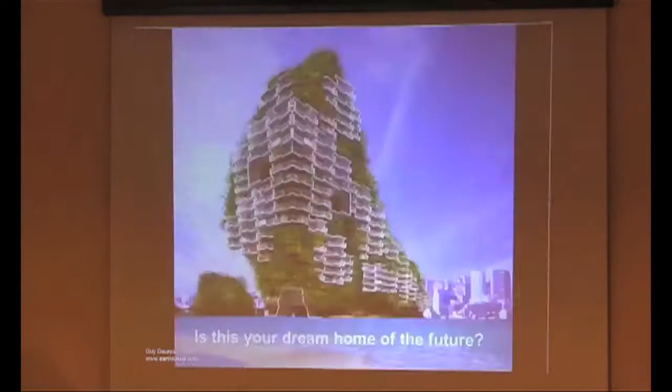So now for just some playful stuff, how would you like to live? I'll give you a choice of some buildings. Do you fancy living in a setup like this? Or that? What's your preference? Hands up who'd like to live in this one? 1, 2, 3, 4, 5, versus this one, the rest of you. Okay, next choice.

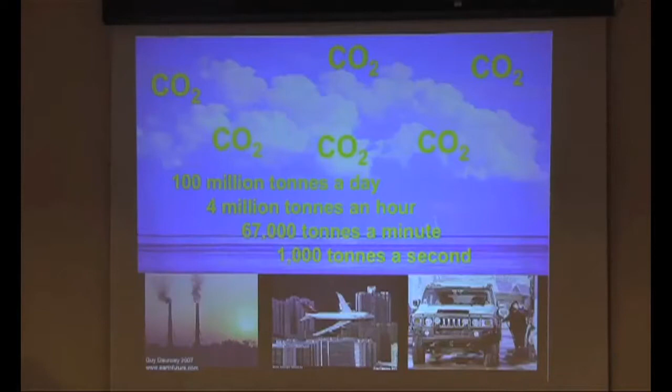And if everyone lived like we do, we'd need 2 more planets to sustain the constant flow of resources we're pulling out of the ground, the energy we're pulling out to make life happen. We're putting 1,000 tons of carbon dioxide into the atmosphere every second from our activities, 24 hours a day around the world, and the atmosphere's temperature is accumulating. So if you had a friend whose temperature looked like that, you'd go like, oh my God, Daddy, you're going to die.

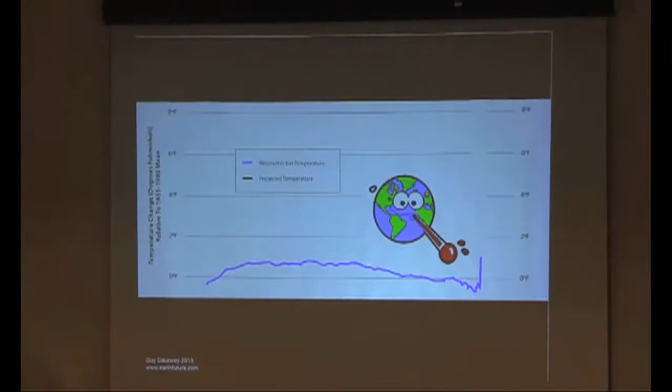Our planet is looking like that and heading for that. We need the same kind of gut reaction, because carbon pollution is going to end the entire era of stable climate over the last 10,000 years. That's where we're heading already. We're on the upward curve, and we have an emergency we're facing. There is no way on the present path we're going to be able to stop below 2 degrees Celsius increase. We're heading for 4 degrees Celsius increase, and 4 degrees paradoxically collapses the global economy. So the reasons we're trying to say we can't do anything about climate change because it might harm the economy will actually kill the economy, because we can't survive 4 degrees Celsius.

With coastal cities facing $1 trillion in flood damage by 2050, just for repairs. And then just last week we saw one of the most powerful, if not the most powerful storm ever to hit land on the planet, in the Philippines. Massive, 2 million people I think it was, out of homes, displaced.

So the last time the temperature was 3 degrees warmer, the sea level was 25 meters higher, which is like more than an 8-story building. So how do we respond to sea level rise?

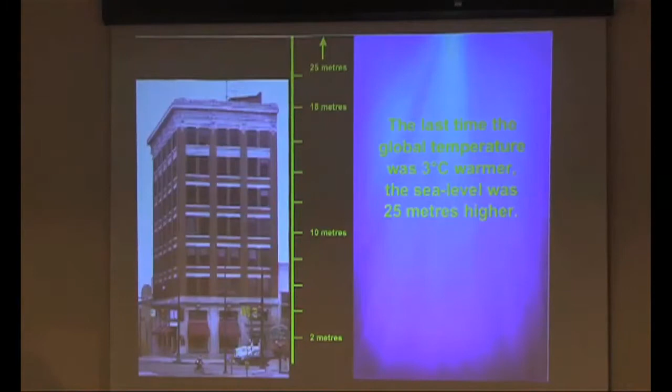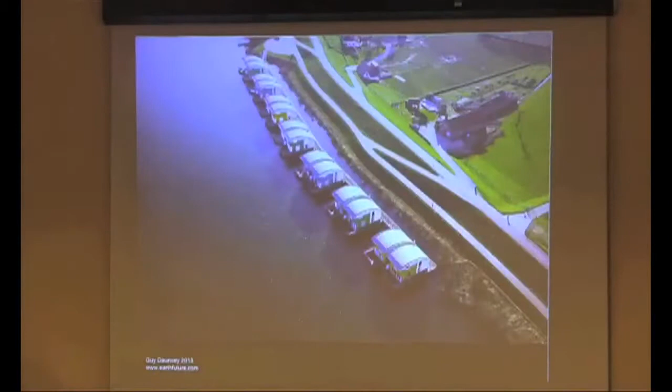Do we go the Dutch way? Does everyone get to live in a house like that, one that goes up and down with the tides on posts? Or the same buildings from the front with the posts. There we are from above. Another version of floating houses. Another version in Louisiana, where you just put it on styrofoam, but the same posts, it floats up with the tide. And a simpler version.

But in reality, okay, of course these are the ones - if you've got a tax haven, you can afford this, right? If you haven't got a tax haven, or even if you've got a big tax haven, you live in that. Or if you've got no tax haven, you do that.

But in reality, we're talking about cities. And all these people - you know, a lot of Vancouver is at sea level - needing to live somewhere. So it ain't gonna work, living in little floating bunkhouses like that. There's New York, also at sea level. We've got a major challenge here.

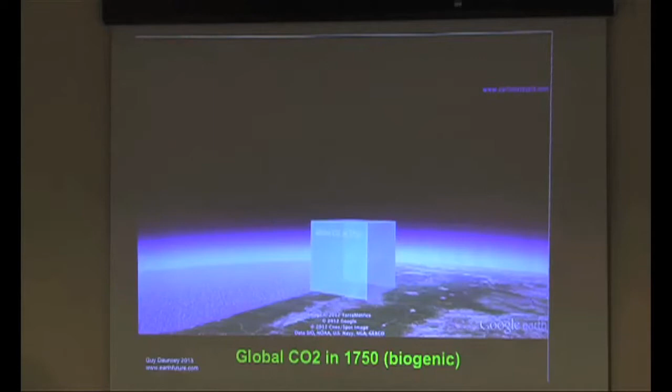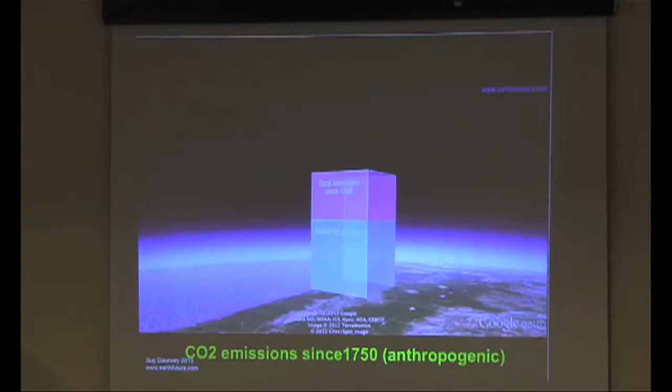So when we look at carbon dioxide: in 1750, before the industrial age, that's how much natural CO2 is in the atmosphere as part of the natural biogenic cycle of trees breathing in and breathing out. We've added that much from burning fossil fuels since 1750, mostly burning fossil fuels, also tearing down rainforests. That's how much more we can afford to burn in order to stay below 2 degrees. And that's how much the fossil fuel companies have got listed on their reserves, on which their stock values are placed, which they're planning to burn. So it doesn't work - we have to leave 80% of those fossil fuels in the ground.

So basically, on business as usual, we're heading for the cliff. We're the great buffalo jump of the world. And we're looking at collapse.

But if we turn left, there's a whole other future. We just take our gaze away from business as usual and look over there - there's a completely different world waiting for us to see. So what is our vision of that future? Because if that future becomes so attractive, we're all going to want to turn there, and no one's going to want to carry on towards the cliff.

If there's no vision to look for, habit kicks in and no one knows what to do. So we've got to have a vision that is more powerful than the fear. That's the piece that's been missing in the entire climate debate for the last 25 years. So what is our vision of the future?

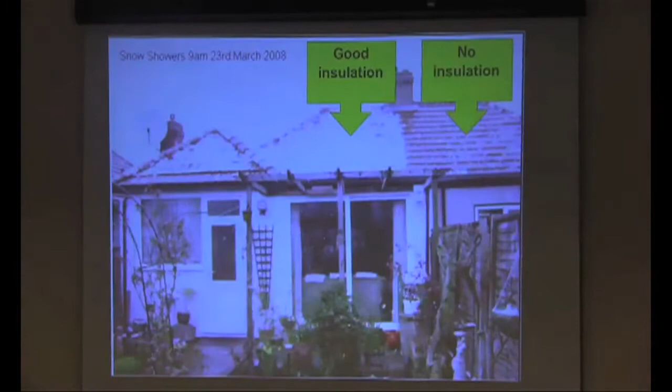The first is energy efficiency. You can go out on a snowy day and see buildings erected within the last 15 years that are losing snow because they just don't have decent insulation. You can do infrared photography and find out what's going on, even on a whole street level. This is happening in London - you can see a whole block of streets where they're losing energy, and a school that's obviously not.

Most of the 2032 building stock will be today's buildings, so we've got to retrofit the lot: the building envelope, changing heat to heat pumps, changing power to solar PV, and using the finance to do it.

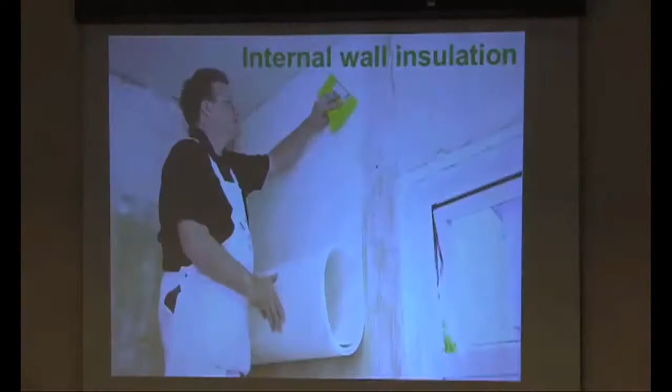So it's everything from the red blower door to find out where the leaks are in your home, to extra insulation. Internal wall insulation is now going ahead in Britain - it's on the inside of your rooms. External wall insulation is happening in Britain too, to actually add an extra layer outside the house. If you haven't got a cavity wall, a lot of Britain's houses don't, so you add an external wall like this.

And that's a close-up in detail of what the external wall looks like, with foam insulation in the middle.

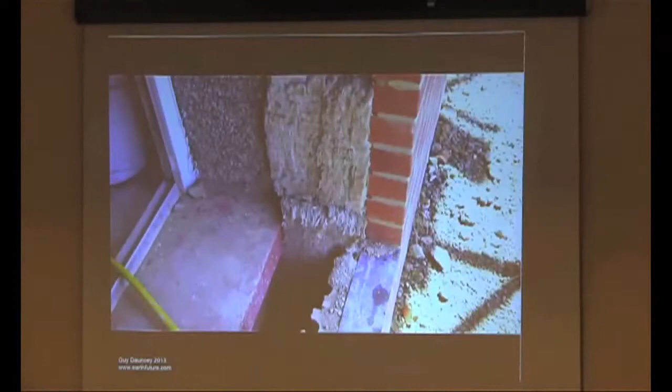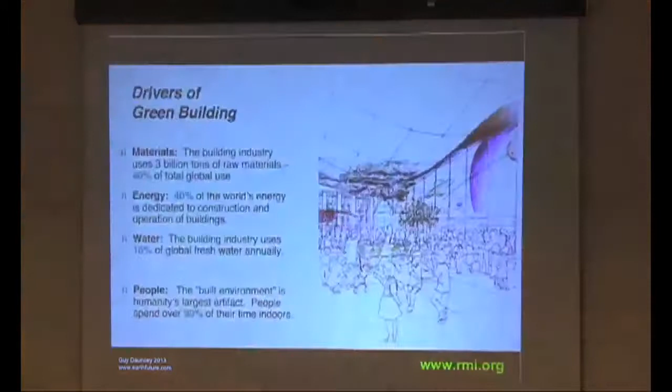The organisation Architecture 2030 has really gotten a good handle on commercial buildings, with a vision of getting them down to zero, being totally carbon neutral by 2030. What's driving it is the impact of materials, energy, water, and human use of them all. So basically, the current US building stock is what it is.

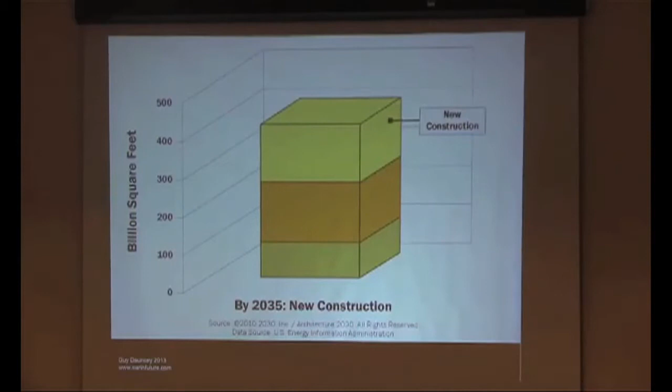A certain amount will be demolished by 2035, a whole lot will be renovated, and there'll be new construction on top of that. So the goal is to get fossil fuel use right down to zero and carbon neutralize what's left, substituting with efficiency and renewable energy.

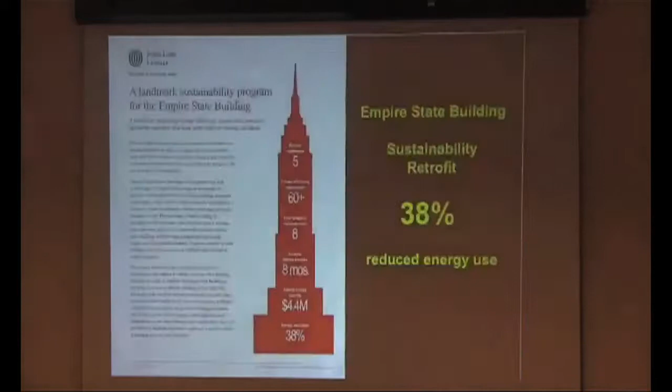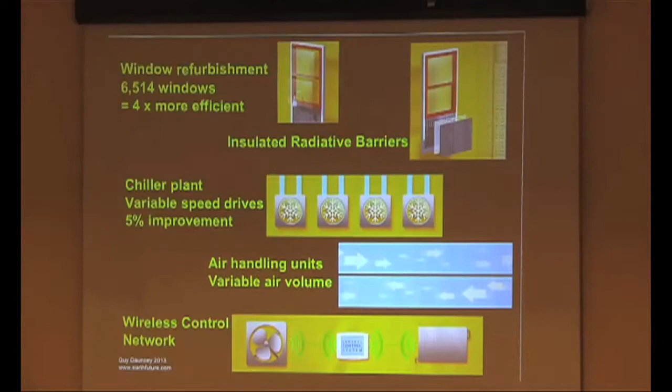To take an example, the Empire State Building in partnership with Rocky Mountain Institute got a 38% energy use reduction just by, I think, 8 basic measures: window refurbishments, insulated radiative barriers, changing the chiller plant speeds, adding air handling units, wireless control networks, changing plugs and lighting, adding daylighting, and doing tenant energy management.

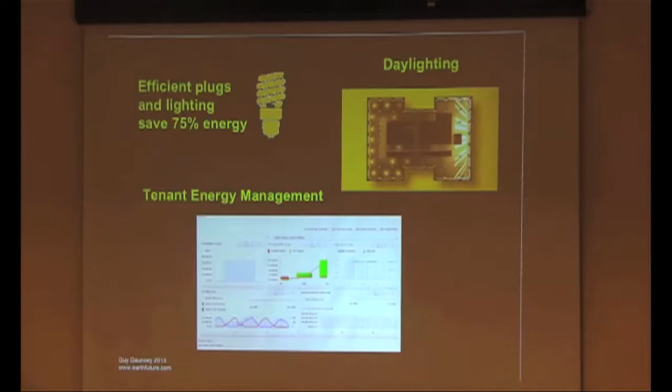So they've really maxed out what you can get for existing buildings. That's pretty good - 38% is about as high as you can get, and that's all done cost effectively with payback.

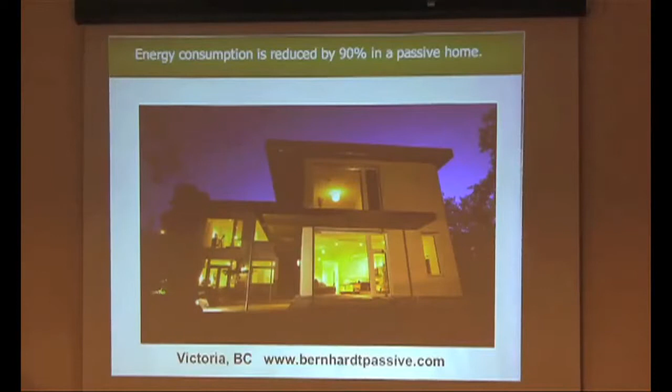For new homes, we can achieve a 90% heat energy reduction. Right here in Victoria, the passive house built by the Bernhardt father and son has shown that they can do that for effectively the same cost as a regular new building.

That's what it looks like - up in Saanich, looks like any regular building. What are they doing here? They've got 16-inch foam insulation under the slab and outside the foundation walls, 8-inch studs, special triple glazed windows, a second interior wall for the servicing, air tightness, blown cellulose insulation, heat recovery ventilation, and natural gas for hot water and space heating with a little on-demand heater - minimal stuff.

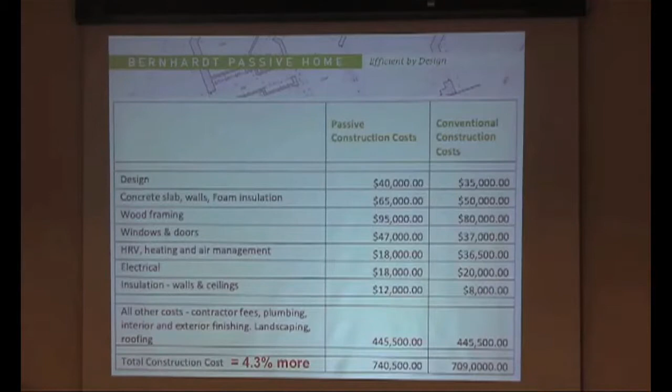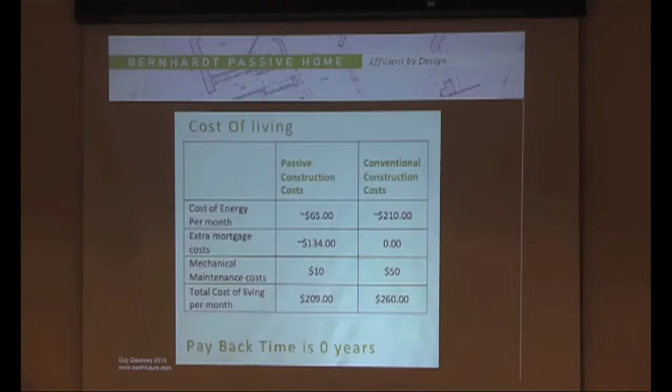The mathematics shows the total construction cost was only 4.3% more than if it had been a regular house. This is a duplex, by the way - 2 homes in one, hence the building cost of $740,000. But the payback time is 0 years because the savings on energy are greater than the extra mortgage cost for the 4.3% increase. They said this is the first time they built a house like this, so next time round, and they're working on a new project right now, they want to get the price down so it's even equal. That's the triple glazed window insulation they're bringing in to make these things happen.

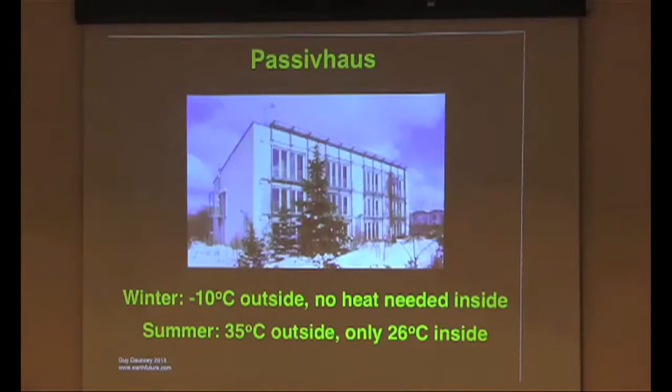These are other passive houses throughout Europe. In a passive house, you don't need any heat until it's -10 outside, and you don't need any air conditioning until it's +35 outside, because the insulation, air tightness, and air exchange look after all that. There's 25,000 of these houses built in Europe, 10 times more efficient. These are all examples of passive houses, so architectural style can be all sorts of things.

Using 90% less energy. When you add solar to the top, they become zero net energy. All possible, all doable. Then we look at other building materials that get efficiency.

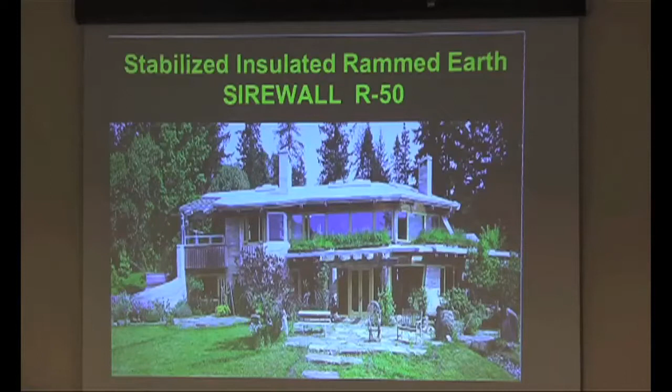So stabilized insulated rammed earth with the company on Salt Spring is getting R50 in the walls, which is on par with the passive house. It's 13 times thicker than the same thickness, it's getting 13 times more efficiency than a regular concrete wall, and 5 times more than a regular rammed earth wall.

There's straw bale construction, which can give you lots of beauty, there's cob construction, and there's an Earthship in the Highlands, and then the numbers look like this. A tent is R1, for contrast.

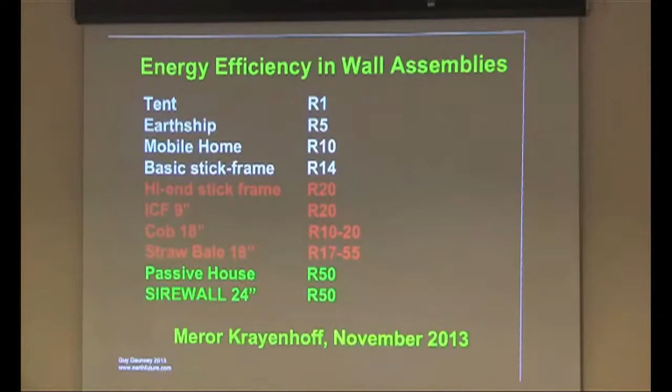High-end stick frame is R20, cob is up to R20, straw bale up to R55, passive house R50, a SIREWALL R50. So you can get that incredible efficiency there.

When we come to zero net housing, the law now in California is that every new home must be zero net energy and emit no carbon and give power back to the grid starting in 2020. And in Britain, every new home must be zero carbon starting in 3 years' time.

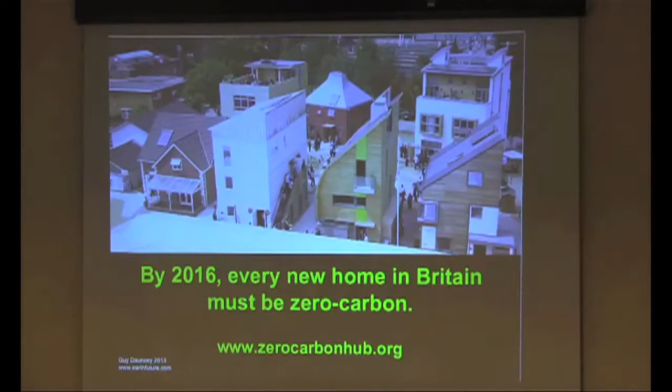So they just made it the law for the whole country, and the whole building industry knows that. We could have done this in British Columbia back in 2007, when we brought in our climate action legislation. But whenever you bring it up, the BC Home Builders Association basically doesn't want to know. They've got reasons, and we've got reasons.

So then we look at the actual heating for buildings that aren't passive house and need some kind of heat. If we look at the family of renewable energy heat pumps, there's a whole lot of stuff coming in on this. So a basic air source heat pump is actually a solar heat pump.

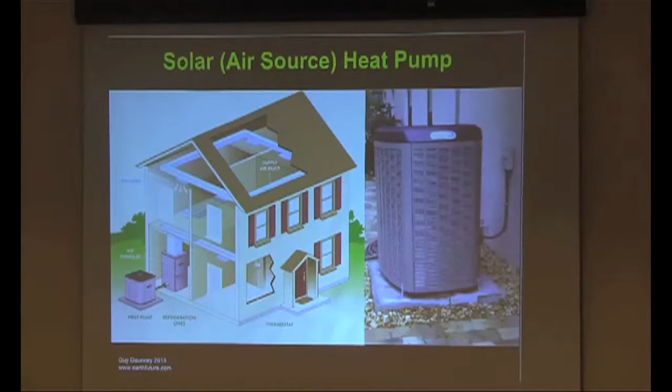But all of the air that's put through a heat exchanger in an air source heat pump is heated by the sun. It's a solar heat pump, guys. And if the market called it a solar heat pump, we'd get a lot more uptake to use them. There are lots of these things all over Victoria already heating their homes from the heat of the sun. And in our coastal climate, when it's not -20, it's just fine for your needs.

There's a ductless mini split solar heat pump just for one room, if you've got no duct system in your house. So you can substitute for baseboard heaters if you want to.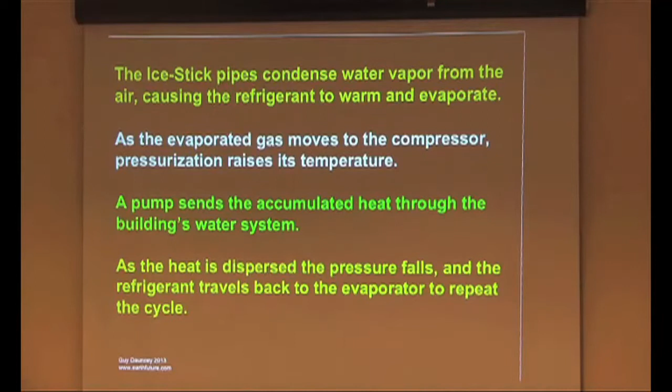Basically, this is taking solar air moisture, or air moisture heated by the sun. So the pipes condense water vapor from the air, causing the refrigerant to warm and evaporate. As the evaporated gas moves to the compressor, it raises its temperature. The pump sends the accumulated heat to the building's water system, and as the heat is dispersed, the pressure falls and the refrigerant goes back.

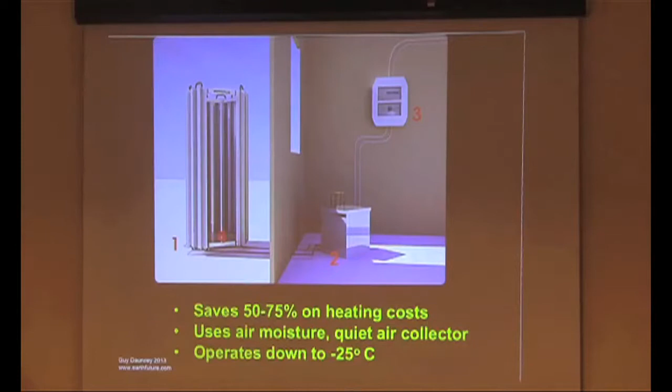Show what's possible, right? Ground source heat pump—there's a long debate, is ground source heat solar heat or geothermal heat or a bit of both? It depends how deep you go, basically. If you're drilling down deep, it's definitely geothermal. If it's surface, it's probably solar.

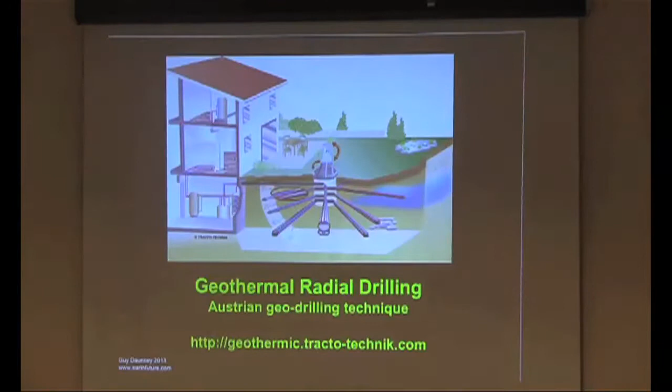But this is doable throughout the prairies. Normally, you dig a trench like that and you lay your coils through the trench. In Europe, they're doing radial drilling. So one little hole in the garden, and they can put in the drilling like that, and the whole garden stays in place.

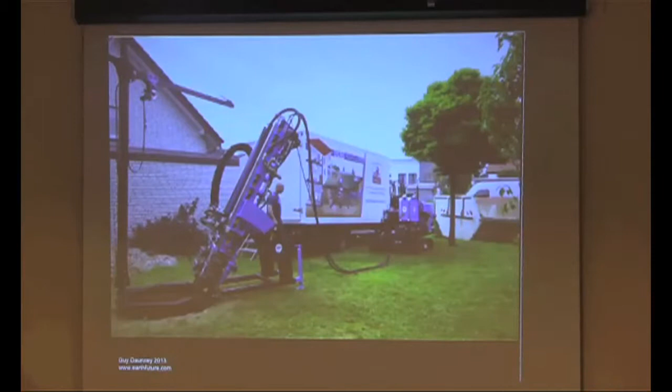No one needs to dig up the roses. They retrofit through the pipes the heat pump exchange units, and in one day, with 24-hour operation, they got a ground source heat pump installation installed, as opposed to the kind of upheaval we're used to over here, when you've got to dig up the whole yard for this sort of thing over and over. So obviously that's going to be cheaper done that way.

Water source heat: the college in Mill Bay, Brentwood College, the arts centre there, is heated by water from the Saanich Inlet. To you and me it is hypothermal, but hypothermal for us is a lot warmer than absolute zero, so the heat pump process takes the heat out of the ocean and heats the building. So wherever we have access to the ocean, we can heat buildings.

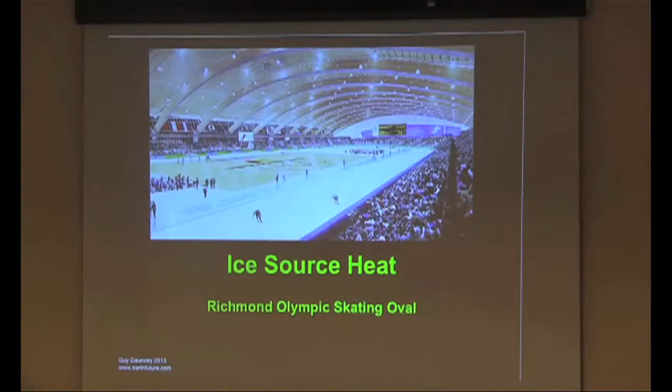Ice source heat: whenever you make ice, you've got to reject heat. This is the Richmond skating oval, and the heat is being put into nearby buildings. Unlike our ice rink here, where it just gets dumped outside and nothing comes of it, because they were too rushed and bothered to have intelligent engineering when they built the new centre.

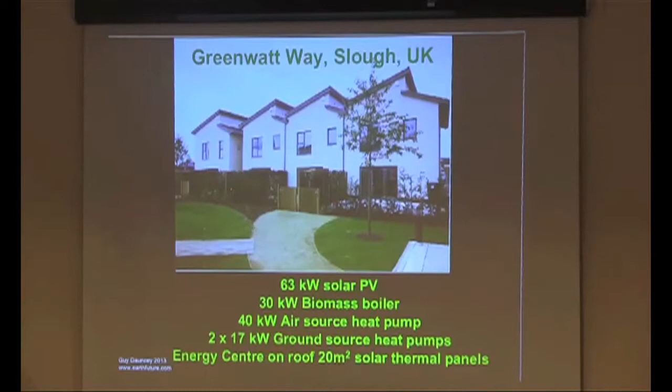This project in Britain is combining solar PV, a biomass boiler, air source heat pump, ground source heat pumps, and solar thermal panels on the roof into an energy centre. And they're way into negative carbon. The apartments are like 60 below, into negative carbon territory, because of all this stuff they're doing. So it's actually contributing back.

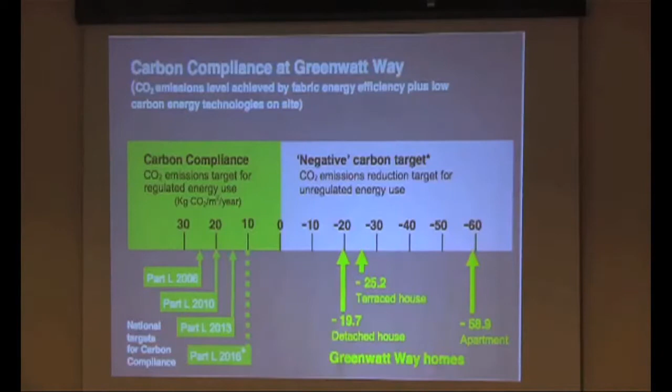District heat systems now, when you have one central source of heat for several buildings, if you're in a city situation, is again a big thing to look at, because it can give both heating and cooling. If you've got a geothermal district heat system, you put the heat in in the summer and take it back out in the winter.

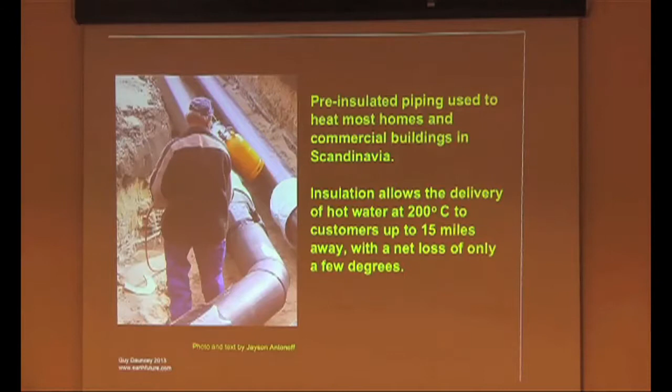And you have pre-insulated piping of the kind that exists in Scandinavia and Europe, which can carry heat from the district heat centre for 15 miles or 23 kilometres, while only losing a couple of degrees below 200 degrees Celsius. So this kind of pipe can't be bought in North America, but it can be bought in Germany, Austria, Sweden, and places like that. So you can do long distance district heat.

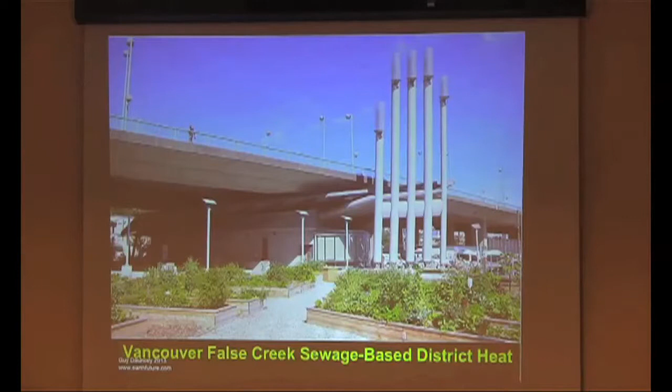In Vancouver, the sewage works at False Creek has got a district heat system for the Olympic Village, getting energy out of the liquid in the sewage. And Vancouver is planning to retrofit as much as possible along the transit line where you've got high density, with district heat systems using waste heat from hospitals anywhere nearby.

In Sweden, there are 80,000 apartments being heated by the heat from treated sewage. They plumbed and engineered the city, so when they built the apartments in Hammarby Sjöstad, I'm sure that's not the right pronunciation, they're plumbing it into the sewers. And in Vienna, where they're using an old waste incinerator, they're heating 60,000 apartments at the same time. So this stuff is happening.

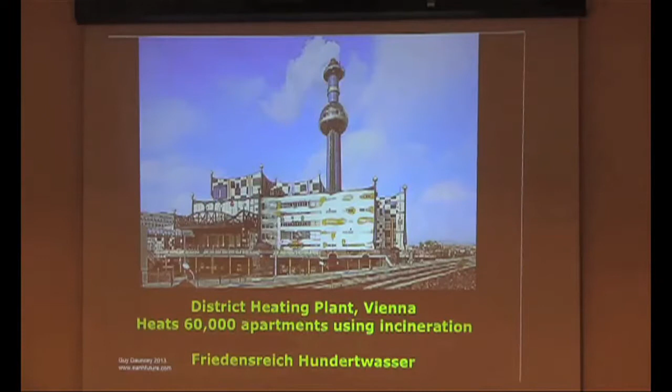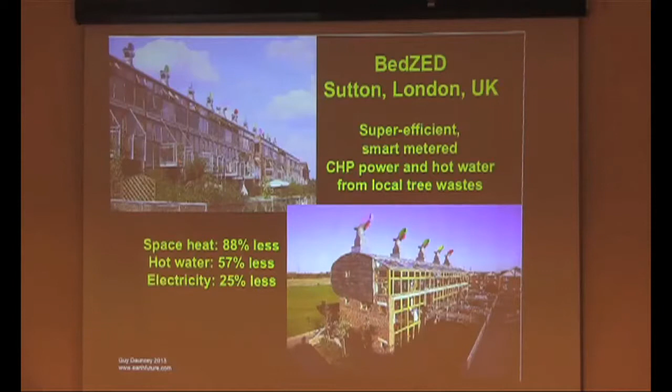Beddington Zero Energy Development in London was probably the first of the zero carbon developments. It's super efficient, with smart meters and combined heat and power. They basically were using trees that were being cut down for hydro lines and stuff locally, which would normally send it to the landfill. The plan was to chip those up and put them into a heat plant, shown at the energy centre at the back of the building, and then have a biomass heat system.

They ran into the first set of problems with 1.0 technology that didn't work properly, and so they now had to improve it. The same happened in Dockside Green. Right here in Victoria, Dockside Green was planned for district heat from waste wood, but the waste wood was contaminated, it had stuff in it, and the building wasn't built out to full capacity, so now they're just burning natural gas. Maybe when they get Dockside Green back on track with the other parts of the development, they can go back to gasified wood waste.

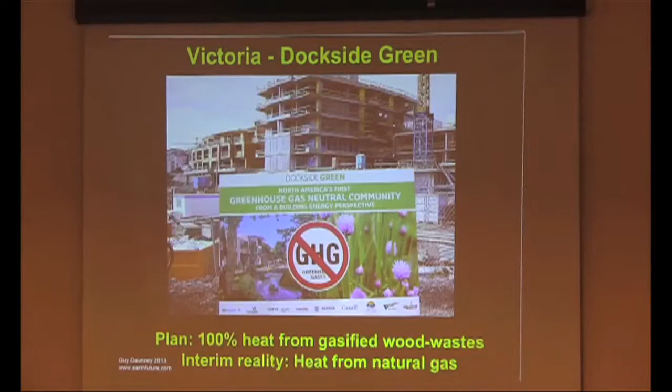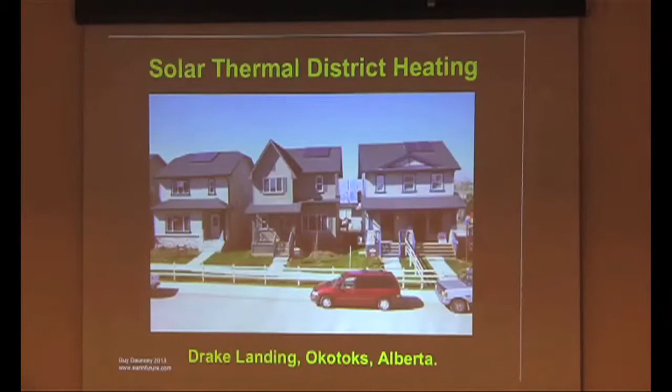So this is new technology that we've got to learn about. In Okotoks, Alberta, there's a whole district heat system that works even when it's -20, using solar thermal energy gathered in the summer. The panels on the roofs there are only for the local hot water inside the house. The panels on the garage roofs are generating far more energy than is needed.

800 panels are gathering a huge amount of hot water during the summer and pumping it underground into the energy center, where there's no groundwater intrusion, so there's nothing to take the energy away. In the winter, they take the heat back and it goes into the homes. So these houses are operating right now with 90% of their energy coming from the heat gathered over the summer.

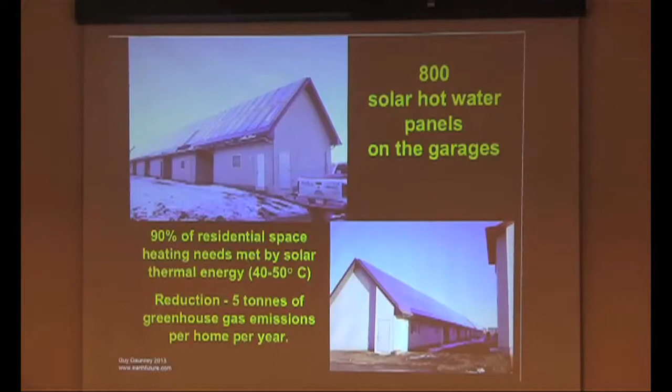Because this was a first generation project, there was a lot of money spent on it, and each house cost a lot extra. But the houses aren't really even passive solar design. If they were passive solar as well, they'd only need 10% of the heat, you're way ahead of the game.

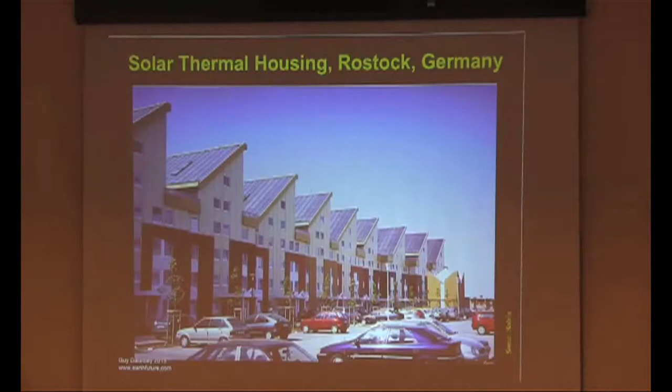In Germany, there's a lot more seriousness of year-round solar thermal heating happening. Each of those roofs is gathering solar thermal energy to store it under the building for year-round heating. The same goes with these roofs here on a residential system. The goal of the European Solar Thermal Association is to get to 100% solar thermal heated, and by 2030, 50% of all new buildings in Europe will be heated by stored solar thermal. Some really good engineering going to be happening there.

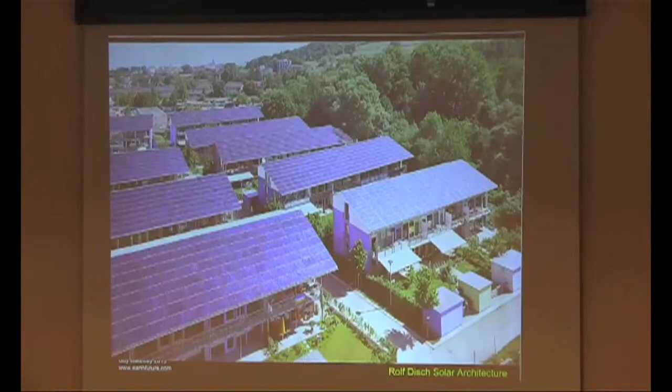So then the third theme is solar energy, direct PV. This is outside Freiburg in Germany, where the entire roof gets solarized. There's work, there's effort, it's all doable, it's all happening. This is the Taiwan Solar Soccer Stadium, where the entire roof there is solar energy. There's examples of that from all over the place now, because the solar revolution is in full rip.

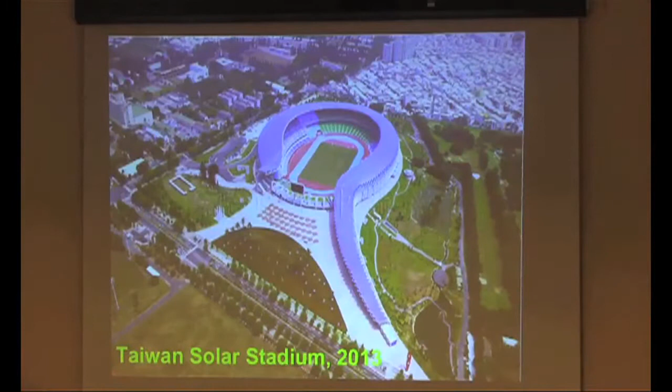Basically, the falling solar price over the last few years has been meeting the rising price of electricity, and there's now a number of jurisdictions around the world which have passed solar grid parity, where it's cost effective to go for solar, no other questions asked, no need for subsidies at all.

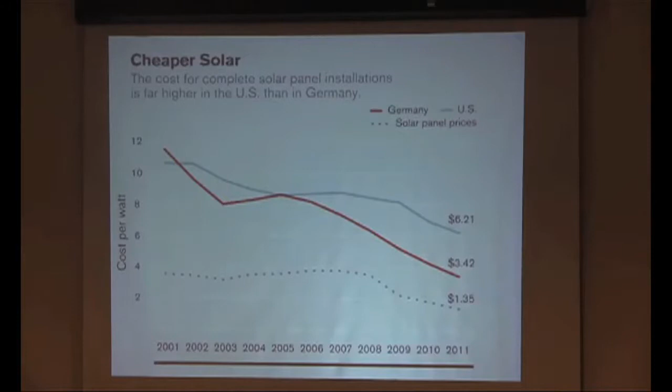Interestingly, the price of solar in Germany, with the same costing solar panels imported from China, is half of what it is in North America. Because they've got efficiencies of scale around everything else, the marketing, the installations, the balance of system stuff, because they've got more bulk marketing going on and more bulk installation. So we could get to that lower price.

Here in Victoria, if you put a 3 kilowatt system on your roof, it'll cost you $15,000 today. Or if you went with what IKEA is doing in Britain, it would cost you $9,000. It'll generate 3,300 kilowatt hours a year. If you did a bulk install and 30 homeowners got together, you could do it for $12,000. That's a quote from the Vancouver Renewable Energy Corp.

So if you look at solar economics, assuming no feed-in tariff, 3 kilowatt system, 3% financing, and 3% inflation in the price of BC hydropower: today, you're laying out $5,000 per kilowatt, spending $15,000, and you're losing $9,000 over the life of the system. But by 2020, you're $2,000 in pocket. And beyond that, you're more in pocket every year because the price of the solar system is falling, and the price of hydro is rising, so every year you're saving more expensive hydropower.

So you can see that somewhere around 2020, the whole thing takes off, and everyone can start automatically installing solar on their roofs.

This is a hybrid solar panel coming in from Portugal, which is actually creating hot water and solar PV at the same time. I haven't seen it in action in North America yet, but Portugal's a hot, dry country, so maybe, who knows.

This is thin film solar PV, also getting on the market, and it's a totally different baby. It hasn't taken off yet because we don't know if it's got a 30-year life cycle against UV rays and deterioration and stuff like that, so that's why you don't see it much.

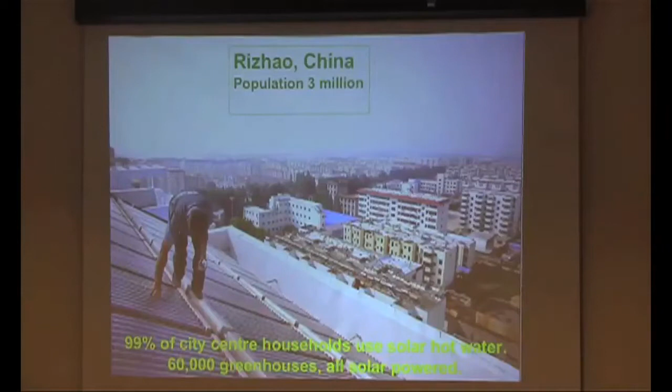99% of all the city centre households have got solar hot water systems, basically looking like this, with a simple tank on the roof. Here in Victoria, James Smythe from Pacific Solar has re-engineered a system like that, which James installed on my house, so that it doesn't need a heat pump. The fluid circulates all the time by a regular electrical pump with a battery in case of power outage. And the price falls from 8,000 to 5,000.

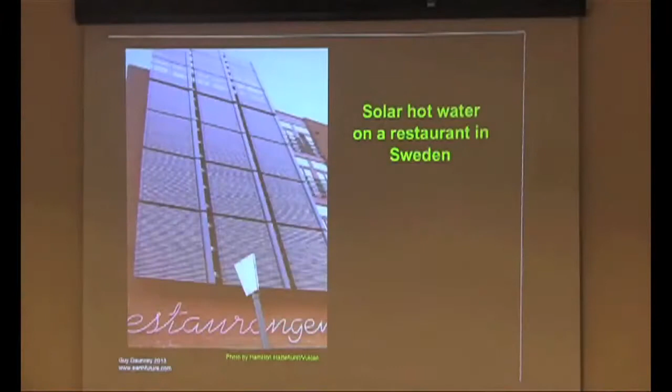Major jump because of a technology improvement. And that's going to be coming on stream in January when the new grants are available region-wide, where the Colwood grants are going region-wide in January.

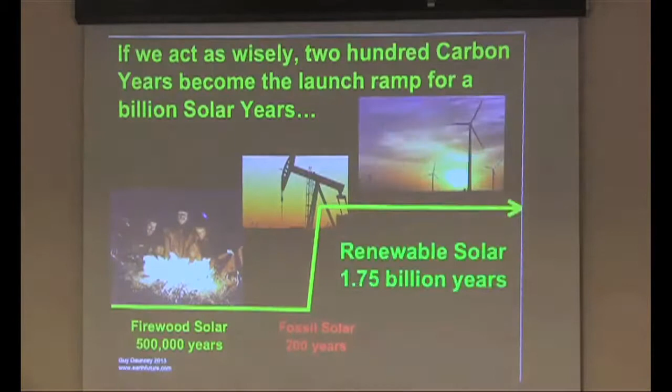So if we look at solar in the human journey: 5 million years of surviving, burning firewood, that tiny sliver of time is the age of fossil fuels. For 500,000 years we burnt solar energy in the form of firewood. For 200 years we burnt solar energy in the form of fossil fuels. And for 1.75 billion years we can burn solar energy in its raw natural form. The number 1.75 billion is because as the sun starts journeying towards its red giant end, that's when it gets too hot and we got to quit and go somewhere else, right?

But I'm not worried about that, frankly. If you can conceive what 1.75 billion years is, it's 1,000 times a million years plus a bunch. I mean, it's just unbelievable. And every single year, the energy gets cheaper for all of those 1.75 billion years. From 2020 onwards, it's free, effectively. And what that means for us as a culture, we haven't really grasped. It's just amazing, because wind energy is solar, hydro energy is solar also, just our gravity.

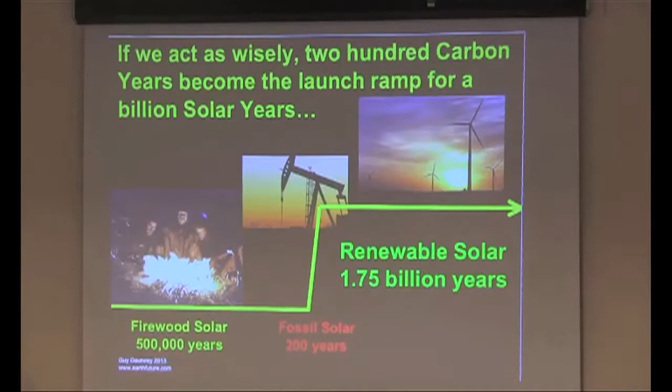So let's look at smart electronics and the way that fits into this. The house off button: when you leave your house, press one button and it powers down every appliance, it switches off every light apart from the stuff that's on the timer, which is sorted out. So you haven't got to worry about going around the house switching the lights off, or leaving them on because we're coming back later.

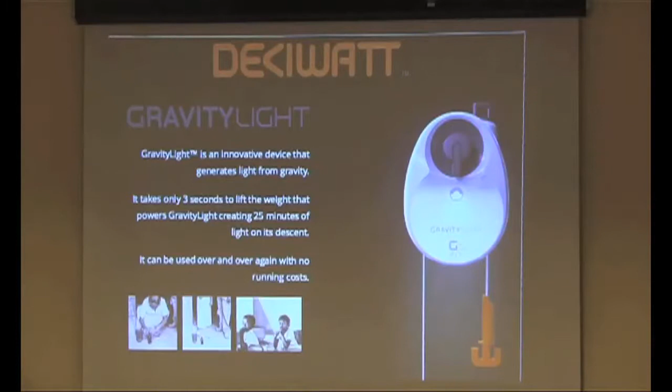Then we have Walmart, as well as its solar kits, selling LED lighting cheaper because they do the bulk discount, begin to get them into mass demand so that it's normalizing LED lighting. This is a fun little thing called the gravity light. You have it on your front doorstep and you pull the cord, it takes 3 seconds to pull the weight, and it'll give you 25 minutes of light by pure gravity transfer through some sort of system. Developed for third world usage, right? But hey, zero energy apart from a hand pull.

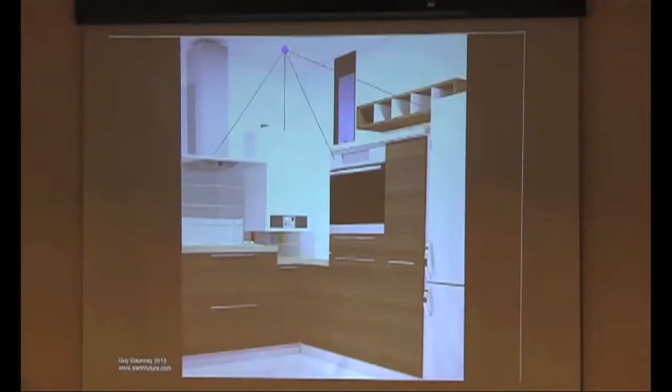And then Li-Fi instead of Wi-Fi, which means light fidelity instead of wireless fidelity. So you're sending your digital information signals through the light source, using the light spectrum instead of the other spectrums that can be harmful to our health. This isn't invented, this is out of New Scientist, it's being developed. So it means that we don't need to worry about Wi-Fi anymore. If you've got a light source in place, you can have the digital signals coming straight to your information device. And that's the whole technology, the whole thing works, how it all integrates in the new house of the future.

We also have a smart thermostat. The Nest thermostat will learn from your behavior: when do you come and go, when you're in the bathroom, what kind of temperature do you like. It'll optimize your comfort while minimizing your energy use from one little appliance, and you can play with it on your smartphone wherever you want and adjust it when you're away.

Water, the fifth theme.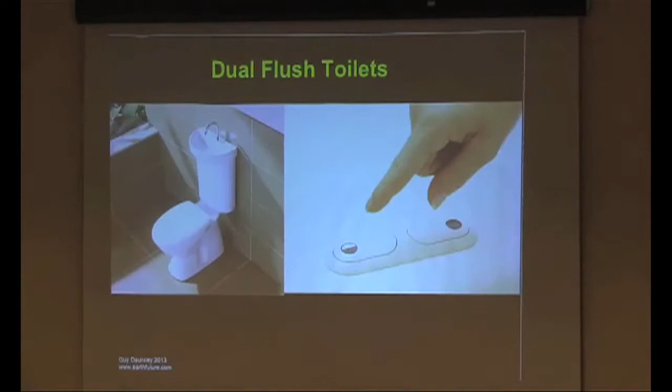We need to be normalizing the dual flush toilet with the water basin on top of it, so we're minimizing water wastage. And we need to make it allowable to have composting toilets inside the house. It can't be mandatory for everyone, because there are a lot of people who aren't always functional. So you've got to allow for dysfunctional housing.

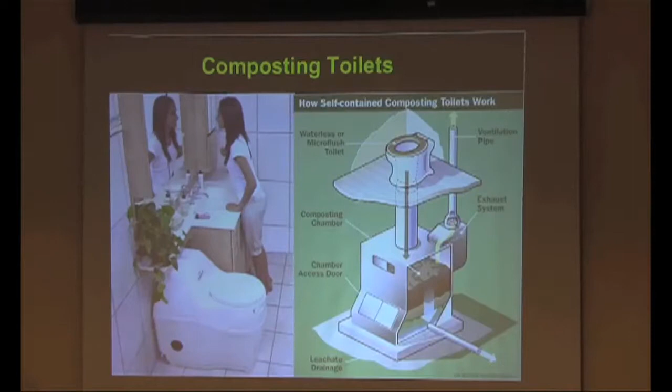Rainwater storage, another big thing for the future. So we're planning ahead to not be impacting the water systems. And then on top of that, bioswales to capture the rainwater on the street, getting rainwater soaking back into the street and converting the street to something more beautiful at the same time. And then porous pavement outside the house.

So look at thinking about water for the future, conservation credits. If you're a builder in 2032 and you want a building permit for a new house, there are water conserving actions in existing houses that earn conservation credits. There are water conserving companies going around knocking on doors and saying, can I retrofit your house and make it more water efficient, save on your water bills, and earn you some credits?

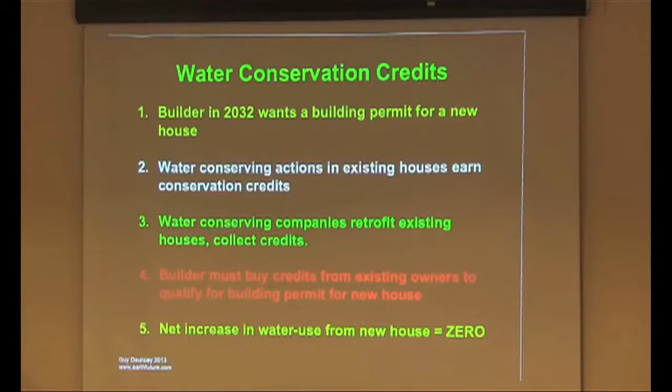And then the builder must buy the credits from existing owners to qualify for a building permit for the new house. So that means the net increase in water use from new houses is zero until you've maxed out your efficiency. And the more you squeeze, the more valuable the efficiency permits become. And when you squeeze it all out, you change to a new system.

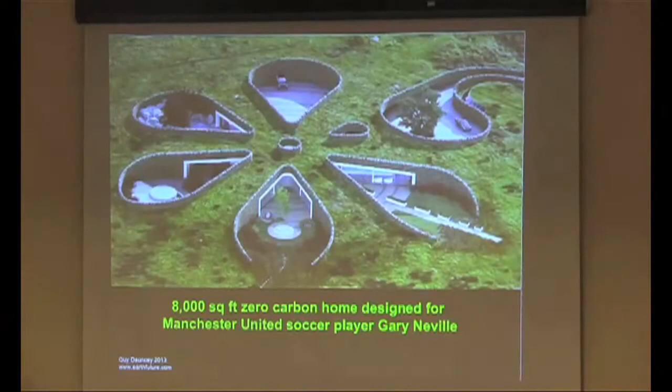Theme 6 is green roofs and green walls. This is the invasion of nature coming back into our cities in an informal way or in an organized way. This is the expensive end of the house for a Manchester soccer player, when he's actually built his house right into the mountain. Or in Tokyo, Japan, a regular house.

The guy who's leading is Patrick Blanc with his book and all his work. A lot of these buildings are his work. He's from Paris, so you're walking down the street in Paris and the whole building is being reclaimed by nature, with an extra skin on the wall so that you don't have water penetration into the walls. This building in Madrid has got 15,000 different plants, 250 different species. And with them come all the insects, the butterflies, the bugs, the wildlife, the birds that come back into that.

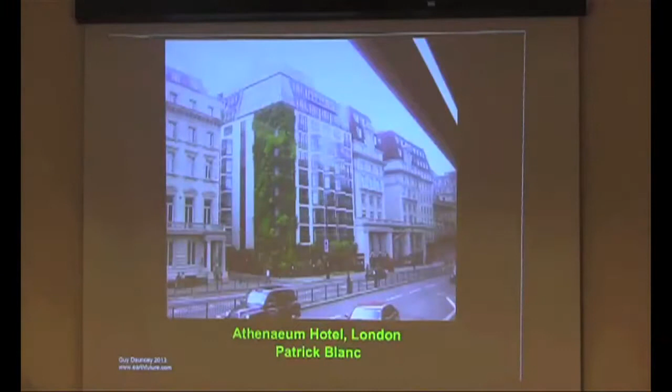Spain, a children's library. The Athenaeum Hotel in London, you're walking down the street and suddenly nature's coming back onto the wall. Vancouver Public Library, we can't actually see it because it's hard to get up there, but right up there we've got this green garden growing on the rooftop. This building in Japan has got 35,000 plants in the middle of the city.

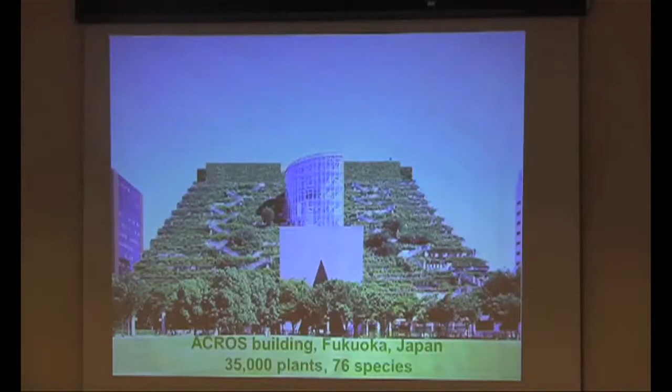The creativity coming into retrofitting our cities is bringing a different genre in.

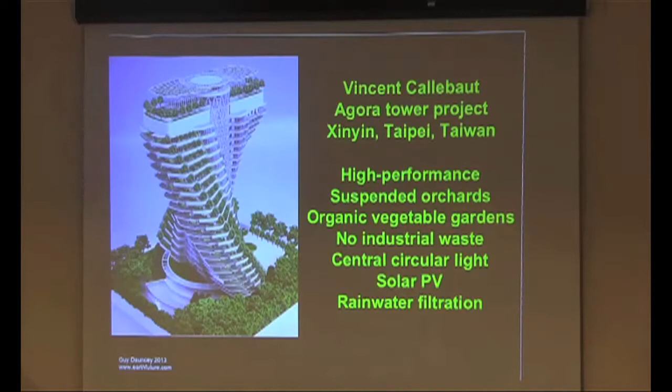Then we get futuristic design. These are Vincent Callebaut's Agora project in Taipei, Taiwan. This isn't just an idea, it's also high performance. It's got orchards, organic gardens, solar PV, rainwater filtration and stuff like that. Here's what it looks like in context.

New three-dimensional automated CAD design allows you to do complicated tensions on angles, corners and bends that old-fashioned engineering could never do. You can work out the tensile structural loads with modern three-dimensional design, right Martin? Yeah, this is the kind of stuff I showed you earlier. This sort of thing will be arriving in the Far East - Japan, China, Taiwan, Singapore. They'll be doing high-rises with nature all over the place.

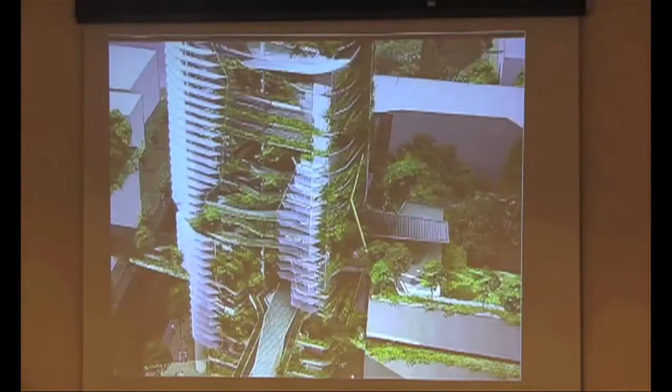And these are some more of his artistic designs to show what's coming. Then we get really wild and fancy.

What did that say? Hang on a tick. You're now residing on reserve battery power, plugged in. How should that be?

So there's a growing movement of front yard food gardening, reclaiming the front yard. I was in Vancouver last weekend and saw people have done this on the boulevards. It's happening here in Victoria as well.

Whole empty courtyard space that they transformed. Space under - I hope this stops soon. It'll stop, maybe, it's all automatic, folks. Must have a timer in here.

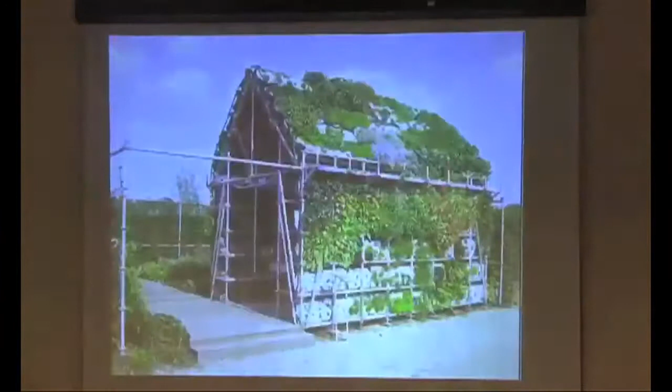Vertical growing, stairwell growing, garden, backyard growing - all sorts of urban food growing things. I hope I'm going to control this one in a minute. Otherwise we've got fun stuff.

Stop! Okay, the market response is interesting - just two very brief themes here, because how does the market respond to a new green building?

Whenever you have a logo of some kind, some sort of certification - whether it's LEED or Living Building Challenge or one of the many programs happening - there was a big survey done in the Seattle area. They found that in 2009, certified green homes, which were 33% of the new home market, had a 37% premium per square foot and were on the market for 22% less time. By July, almost 50% of new homes were being sold with a green certification. Once the level passes 50%, appraisers have to discount the value of a house that is not certified green, because green certified buildings become the new norm.

In the recent climate collaborative agreement that BC signed with Washington, Oregon and California, there was a commitment to do energy labeling at the point of sale and energy upgrade at the point of sale. I don't think people in government know that yet, but they did sign on to it, so hopefully we'll see it happening here.

So the ninth theme is green streets and neighborhoods. We need to think about redesigning, remodeling, reclaiming space. If you live in that place on the left, you have no fun at all - but every three years the Stanley Cup happens in Vancouver and you're going to have a riot. Life is so boring in the suburbs.

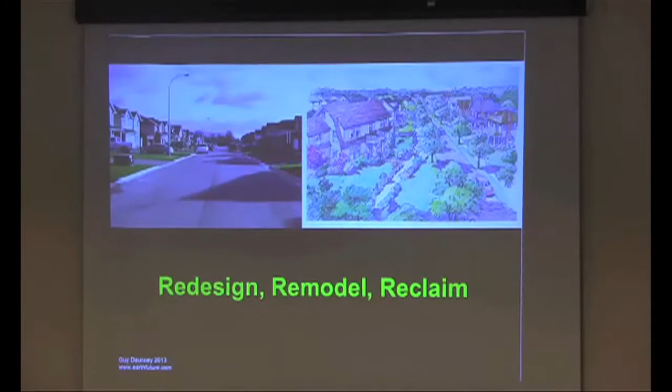It was fun in 1945. It was better than Chicago suburbs or Toronto suburbs, but now it's boring. When you reclaim it, do fun stuff with it.

It starts with tiny stuff like curb cuts, adding extra greening, narrowing down the streets at the same time, celebrating the intersections, like happening in Portland, Oregon - organizing, getting the neighbors on the street, so you're building social capital, building friendships.

Narrowing down the street from a normal 3-lane street to basically a 1-lane street with parking places. Now you're connecting, you're talking, you're slowing down - the street becomes a human place. Redesigning houses so that you haven't got a road in the middle at all - you've got a human meeting space, as every village in the world before 1900 was like.

It's called pocket neighborhoods, so you can actually build it into any new development. What happens is people start reconnecting, and the house, instead of becoming a little prison with fancy devices inside it, becomes part of a neighborhood where you've got friends and relationships.

This is a brand new development - not an old-fashioned development from Victorian England, but a brand new one designed around a beautiful tree. This is an old development in Japan, where they did density transfer on the right-hand side, giving you this wonderfully quirky, curvy green neighborhood on the left-hand side. This is a similar project by Hundertwasser in Germany, playing with fun while building and creating neighborhood at the same time.

And then the final theme has to be affordability when we look into all this stuff.

Right now, a 2-story house in Vancouver averages $1.15 million, the kind of stuff that 20 years ago when I moved to Victoria you could buy in Esquimalt for $150,000 or $100,000. A detached bungalow is over $1 million, and a condo almost $500,000. So even to get the down payment, you've got to have $200,000 to $300,000 in the bank to be able to afford the mortgage.

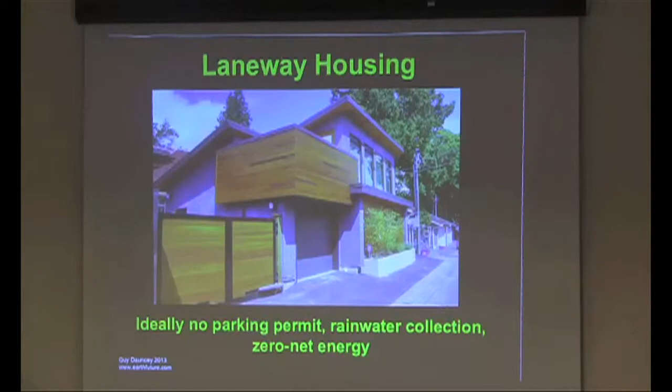Rooftop housing, where you've got a flat roof, you can put a loft cube on top of it all and live in it. There's a lot of flat roof sitting around there doing nothing.

Shipping container homes. These are being built in Vancouver right now, where the average cost of a unit - they're small, deliberately affordable, around 280 square feet - base cost $85,000, and a similar size unit with regular construction was like $155,000.

Community land trusts, getting the land out of private ownership, becomes a big breakthrough here. So we look at the financing - how do we get the money, and then finally how do we get money to buy the land to build the housing? These are ideas I put into my new book, Journey to the Future.

An escalating land tax on empty properties, where they're sitting waiting for the land to escalate so they make pure profit. And the money going into an affordable housing authority, proposed for Vancouver, used in community housing circles run by community associations to buy land owned by a land trust and build housing.

If you're on the property market, you don't want to be in a land trust, because your land value will not increase. But if you know you're never going to be able to buy a house, and you're in a land trust, and you've got secure housing for life that your children can inherit, you're going to say it's a pretty good deal.

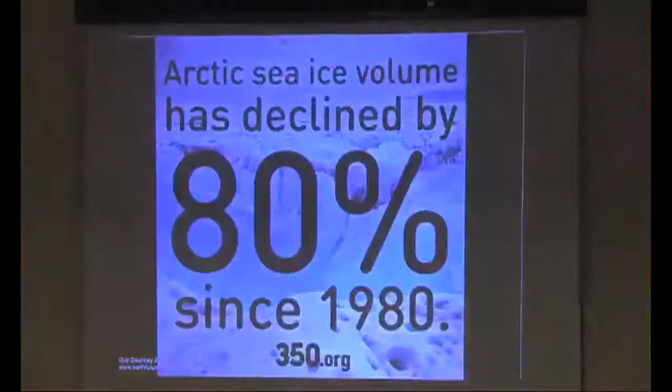And we have to remember in all this that the dream is a city free of fossil fuels, and it's an urgency thing. The Arctic sea ice has lost 80% of its volume since 1980. We have an emergency on our hands. The clock is ticking fast all the time. We're nowhere near reacting fast enough. A green sustainable future is not an option, it's an absolute necessity for all of us.

And every one of us must become engaged in some particular hands-on way. So it's, as the Queen would say, keep calm and change the world. Or in a bottom-up approach, we can change the world.